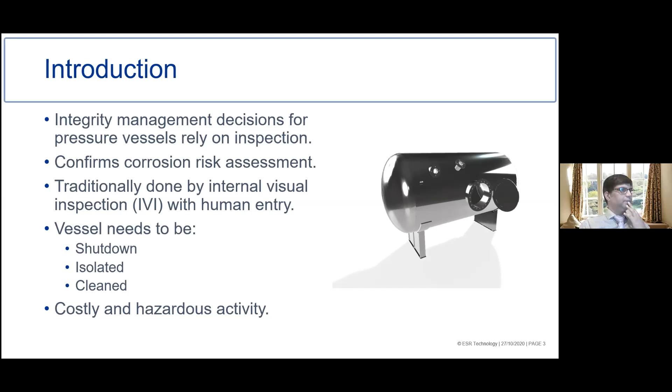And that's where non-intrusive inspection comes in. NII is a process, it's not a technique. It uses non-destructive testing techniques within it, but it's a whole process.

It's usually carried out externally of the pressure vessel, and normally when that pressure vessel is online. So you don't have to shut down and you don't suffer production losses. Sometimes it may be carried out while the pressure vessel is offline, if it's particularly a hot vessel or something, but normally you can do it online.

The thing is that internal visual inspection is usually much more flexible than NII. When you put somebody into a pressure vessel, they're able to look around it without necessarily having advanced knowledge of what type of degradation they're looking for, and they can change their inspection techniques, adding extra inspection techniques while they're in there if they have concerns.

So in order to do NII, we have to think a bit differently. There's a really big emphasis on understanding the degradation types that could be in a pressure vessel, because inspection techniques are very morphology specific. They have different probabilities of detection depending on the type of degradation that's there. One technique may be very good at detecting wide pits, but if it's a very narrow pit, that technique may fail to pick it up. So it's really important that we have an understanding of it.

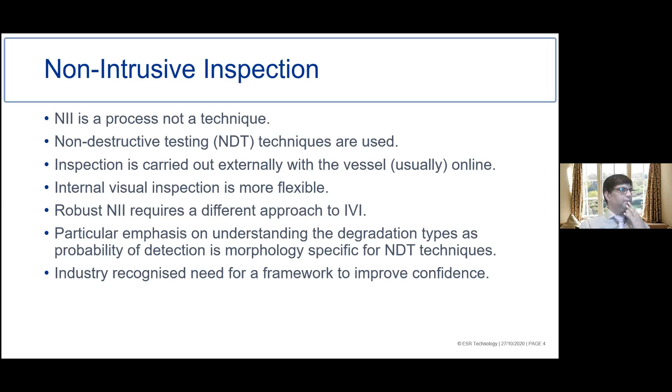To give a brief history of the recommended practice, NII has been used well before 2000, in high value cases, with a lot of design for the inspection coming from the nuclear industry. It started in 2000 that there was a move to have a more rigorous approach to it.

HOIS started development of NII guidelines, driven by operator members and the UK HSE. At the same time, Mitsu-Babcock sponsored a project into NII, and those outputs were shared and included within the HOIS development. Some pilot projects were run with ESR technology in ConocoPhillips and Marathon, and then there was wider application by a limited number of operators.

Following all that testing, in 2007 HOIS published the first set of recommended practice through DNV, as DNV-RP-G103. The choice to publish through DNV at the time was because HOIS didn't enjoy the public awareness that it has now, and it was to try and reach as wide an audience as possible with the publication.

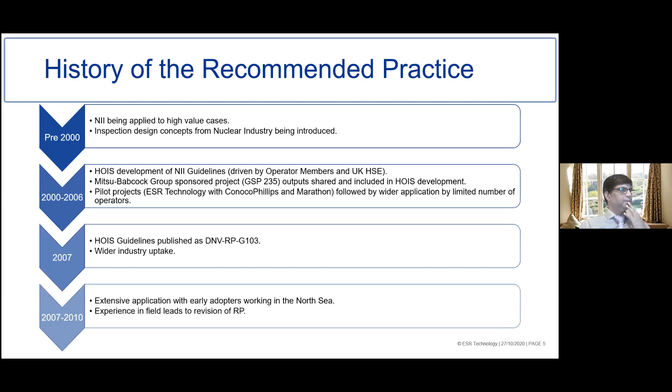Following the publication, there was a wider industry uptake, and we saw extensive application between 2007 and 2010. With the increased application, people realized that the recommended practice could do with some updates.

In 2011, the year I started in NII, the second revision of the recommended practice was published, and it included options for deferring instead of just replacing an internal visual, and also had requirements for the evaluation phase of NII.

Again, there's more increase from 2011 to 2017. We started seeing more uptake around the world. HOIS also developed a recommended practice on statistical analysis of inspection data to help support the evaluation phase of NII. And operators started building NII into their internal processes and setting targets for its use.

But again, we realized that with the greater interest in NII, it was time for another update. The OGTC also supported greater industry uptake of NII, and there was more interest in having NII thought about from the design stage of building vessels. So in 2017, another project was started to update the recommended practice, and finally this year in February, we managed to get the third revision published. This time it was published through HOIS as HOIS RP 103.

So I'm going to talk about the updates to it today. At the same time, we also published guidance notes to support the recommended practice, with the support of OGTC, published as HOIS G103.

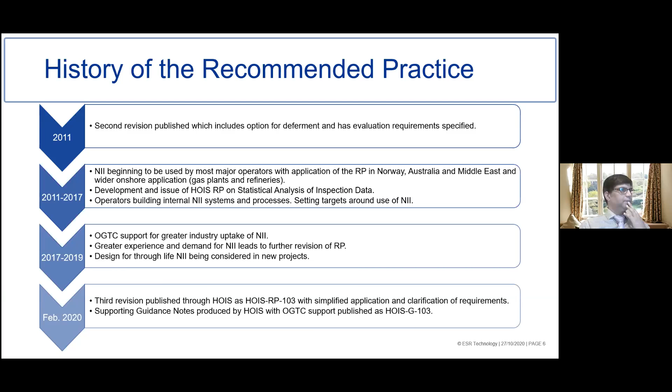So the NII process fits very much into the whole Energy Institute's idea of plan, do, check, and act. I'll go into each of the processes in more detail, but the plan is where you assess whether NII is suitable and develop a work scope. The do is inspection, the check is evaluation, and the act is updating your RBI.

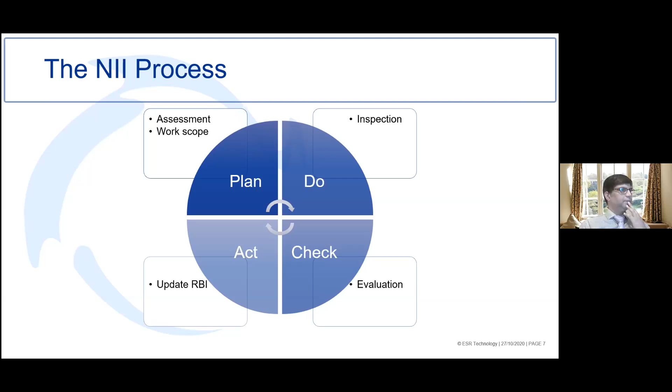So the NII process, we start with an assessment where we review the process of the vessel, the process history, the inspection history, and the corrosion risks. This is a really important phase, and it's important that we get good corrosion knowledge or input into this phase. It's at that point you determine the suitability of the vessel and what coverage is required, what techniques, and the locations.

You then develop a work scope to provide instructions to your inspection team and include your reporting requirements. We've also got the inspection phase.

Sorry, I just realized I didn't have the plan, do, check, act there. So in the do part, the inspection phase, you inspect the work scope and conduct any additional inspection if required. So although I said IVI is flexible, NII is less so—if the technicians find some corrosion out there, they may extend the work scope depending on what they find.

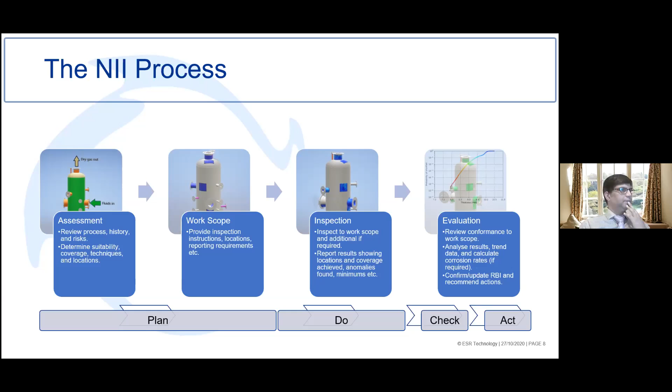So the report is generated from the inspection showing what locations were covered, any anomalies found, and what the minimums were. And then the final phase, the check phase, is the evaluation, where you review how well that inspection matched the actual work scope. You analyse the results, trend data, calculate corrosion rates if required, and confirm or update your RBI and act on any recommendations from the evaluation.

So I'll start going into some of the updates. The first phase is an assessment, or screening, where you're determining at a very high level whether a vessel would be suitable for NII. There used to be a question: was the vessel designed specifically for NII? We've removed that question, because even if a vessel was designed specifically for NII, that doesn't necessarily mean it would still be suitable for inspection. So that's now been removed.

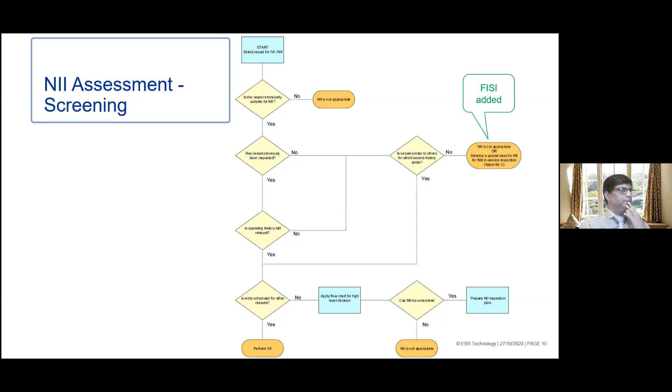But in the screening phase, we now have first in-service inspection. Previously, if the vessel had never been inspected before, and it wasn't similar to vessels you already had history for, it was advised that you should do an internal visual inspection. But particularly in Australia, where the first inspection is due within the first year, an NII approach is still preferred. So we've now got a section on FISI, or first in-service inspection, where you have to have a much stronger corrosion risk assessment than for another NII, and you have to do a lot more coverage.

Once you've gone through the screening, you go into the actual suitability assessment. There's a flow chart which basically asks three questions. It looks at the confidence and ability to predict the type and location of degradation, the previous inspection effectiveness, and the severity and rate of degradation.

So obviously, if you haven't got a lot of confidence in the corrosion that's there, you probably should think more about doing IVI. And similarly, if you have a very severe rate of degradation, there's higher consequences, or more likelihood of higher consequences if you were to miss some degradation. This flowchart just takes you through it. The new guidance note provides suggestions for the selection, trying to help with examples about how to determine each of these levels and the answers to these questions.

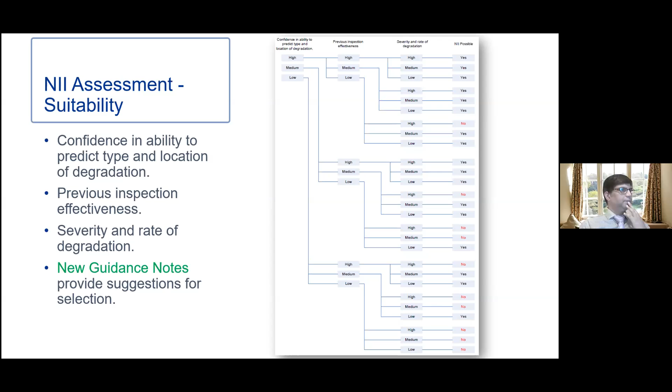If you determine that a vessel is suitable for NII, there are 3 different strategies you can take. Type A, where the aim is to confirm there's no onset of degradation, which would be a sampling inspection. Type B, which is to confirm your predictions, also a sampling inspection but at higher coverage. And type C, where you're confirming absence of flaws of a particular defined limiting size, which is like 100% coverage. The changes are in the recommended practice now, and the flowchart on the right is new, to help people who are more visual in how they read things.

Type A was originally intended for vessels that are corrosion-resistant alloys, or clad internally with a corrosion-resistant alloy, to confirm there's no onset of degradation. But we've now explicitly allowed carbon steel vessels, with the proviso that they really do have to have a very good history of no corrosion at all, and it is very unlikely you would see corrosion. So it's more along the lines of dry gas processing vessels.

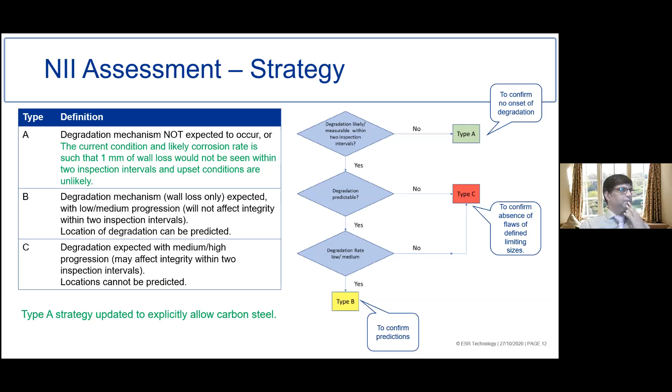The recommended practice also now has much more detailed descriptions of how to set the requirements for an inspection. There are now calculations to help you work out what sort of coverage you should be applying for type A and type B inspections. There are also tables to help you set the probability of detection requirements - that's the depth of imperfection or flaw you're looking to find, and what aspect ratio that should be at, how wide it is compared to its depth. It also gives tables for accuracy, and both probability of detection and accuracy are based on consequence of failure or some other value.

So like I was saying earlier, the strategy and the inspection requirements rely on a good understanding of the likely degradation.

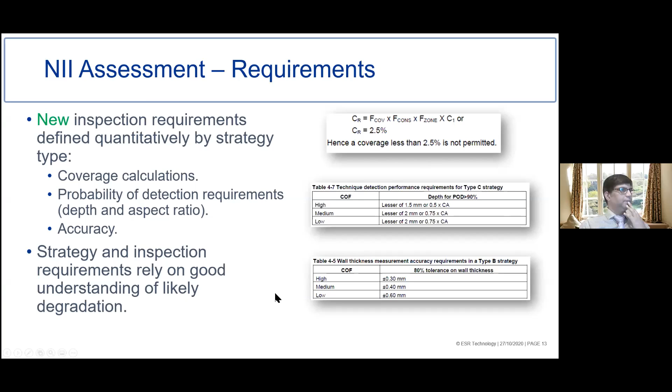One of the new things in the recommended practice is this idea of density and homogeneity, and it being related to spatial distribution. So on this drawing, for example, you've got two boxes. You've got a red box around an area which has got a lot of degradation in one small area, so you would call that quite a high density. Whereas in the green box, it's a low density - there's less flaws within the same size of area. But between the two, they're very different in terms of the spatial distribution, the homogeneity.

If you imagine - because if you look at the big image, you think that, well, this is quite homogeneous, it's pretty much the same everywhere. If you were to take a sample, you should be able to find degradation and be able to work out the other areas that you haven't inspected. But when you actually start splitting it up, it can be very different.

These are new concepts, and at the moment there's not a lot of information out there about what to expect in terms of how dense you can expect, for example, CO2 corrosion to be. It is discussed further in the guidance notes, and some examples are given, and it's quite a common sense approach. So for example, something like under deposit corrosion is likely to be low density and low spatial homogeneity, because it can just be very isolated if you just have one deposit sitting on the bottom of your vessel.

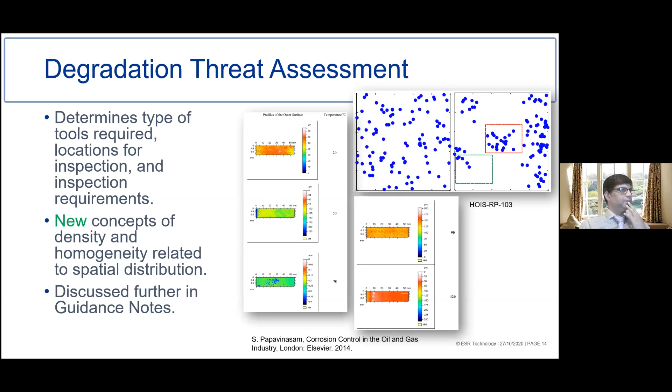Once you've determined your coverage you can then move on to recommended techniques. You have to set what inspection techniques, and the recommended practice has now got a simplified approach to this. It's got a table that looks at vessel features and what strategy that would be applicable to, and some suitable techniques, so it just makes it a little bit easier to specify what techniques would be suitable.

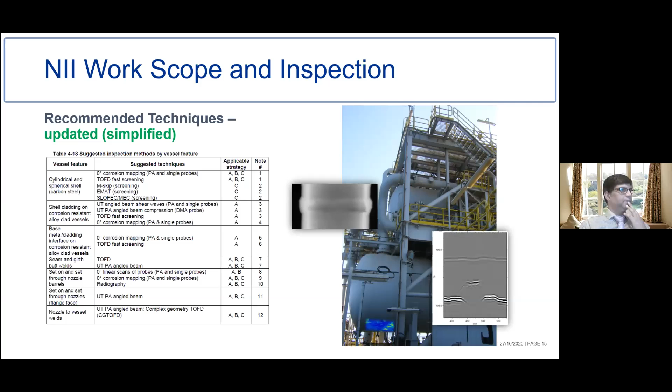And the evaluation section, this is often the bit that people forget to do, but we have to check that the inspection actually met the requirements that were set out.

The recommended practice now separates out the concepts of conformance and analysis. In conformance, you're basically saying, did we get the right coverage? Did we get the right locations? Did we use the right techniques and probability? And did we achieve that probability of detection?

There's some updated definitions of conformance in the recommended practice. The analysis section, where we determine corrosion rates and things, now includes information from the HOIS statistical analysis recommended practice.

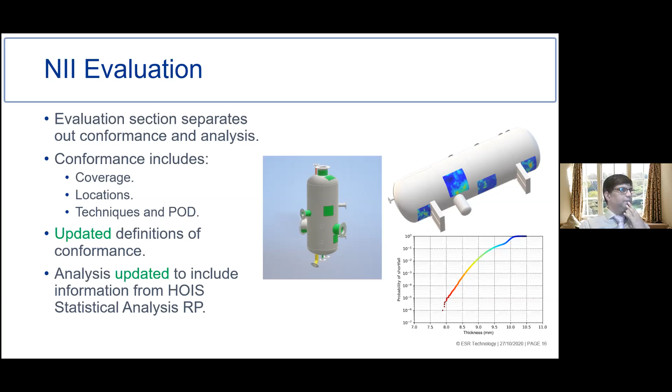To summarize the changes that have been made in terms of updates, it's a HOIS publication now rather than DNVGL. We've removed the screening condition of was it designed for NII. Type A strategy now explicitly allows carbon steel vessels, and the technique selection advice has been updated, along with updates to conformance levels and evaluation phase.

In terms of new things, there's the strategy flowchart I showed you earlier. There's now a quantified definition of requirements by strategy types, so all those calculations and tables are now in there. We've introduced the concepts of homogeneity and spatial distribution of corrosion, and there's first in-service inspection guidance. So there's quite a few new sections and appendices.

There's a review of the candidate inspection techniques. There's some advice on vessels that are internally clad, and some advice for designing vessels for inspectability. There's advice on doing NII as a repeat, and NII as the first in-service inspection. There's also information about the HOIS work on NII and IVI trials, and how to do some evaluation of the inspection performance achieved.

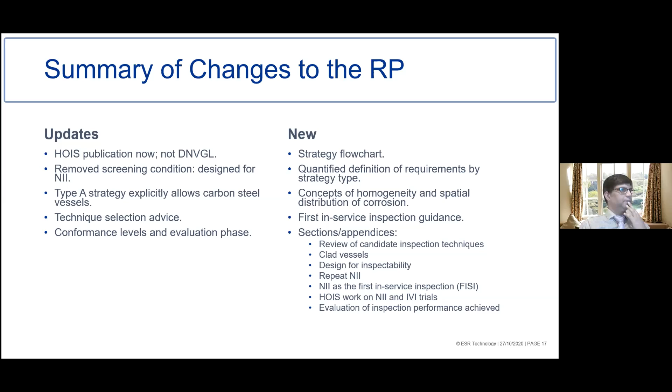So I mentioned the NII guidance notes, which was an OGTC and HOIS project. The first part of the guidance notes provides additional advice on each section of the recommended practice. But I think one of the bits that a lot of people will probably go to is the appendices, where there are a lot of worked examples for each different inspection strategy type.

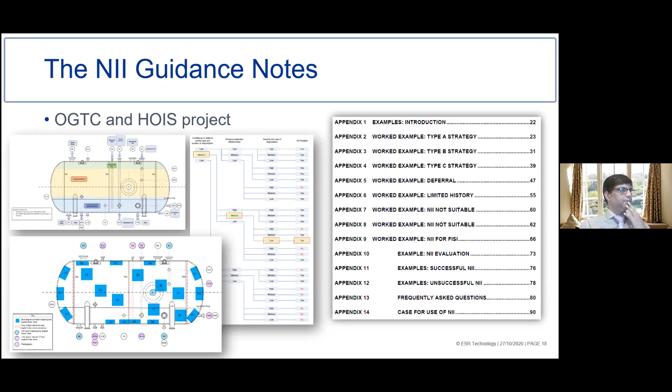For a deferral when you've got limited history, it also looks at when NII is not suitable, because NII is not always the best option. It also provides some successful NII stories, some unsuccessful NII stories, and some frequently asked questions, and it's got a 2-page summary to make it easy to put to managers the case for the use of NII. It's explained in more accessible language.

So in terms of some examples of applying the recommended practice, this is an example of where there was a hydrogen sulfide absorber. Internal visual inspection was required, but this was going to involve the removal and replacement in the correct order of 30 trays, and getting the correct orientation of the trays, which would mean internal scaffolding. Some surfaces were obscured from visual inspection anyway, and it was going to involve a 5-week outage.

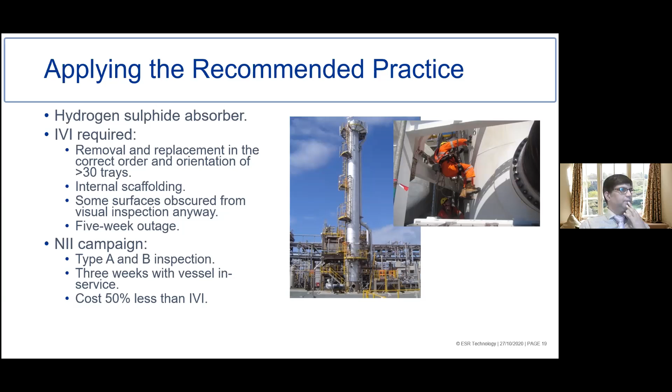The client did an NII campaign on it, involving a type A and a type B inspection. So the vessel was divided up into 2 regions, with different inspection strategies applied. It was a 3-week inspection, and the vessel was in service the entire time. Even the inspection on its own cost 50% less than doing internal visual inspection. So this was quite a success for that operator.

So what next? Well, interest in NII continues to grow, particularly as budgets are hit even more. Advanced inspection techniques are becoming much more standard. So what previously required getting in a specialist inspection company, a lot more incumbents now actually have the tools offshore.

The HOIS Recommended Practice for NII on clad vessels has been published. So that's an actual recommended practice for doing NII specifically on clad vessels. We're also working on remote internal inspection, a recommended practice for that, because one of the things NII doesn't tell you about is things like internal furniture.

HOIS is also developing a digital twin guidance document as 3D imaging starts to become a lot more popular, and being able to visualize your inspection results on 3D vessels. And obviously inspections are delivering more and more amounts of quantitative data, so there's also growing recognition of the value of data and the benefits of statistical analysis in support of NII.

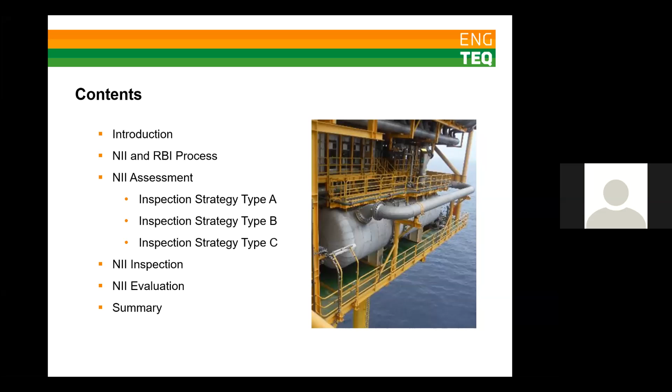So non-intrusive inspection should really be a team-based activity, in exactly the same way that risk-based inspection is a team-based activity, and for the same reasons. It's multidisciplinary, which requires input from corrosion, integrity, and inspection engineers mainly, but it might require input from other disciplines such as chemistry, process engineers, operations, etc.

One of the main reasons for using NII, for the benefit of the operator, is related to cost savings. As Susan's already said, these cost savings aren't necessarily down to lower inspection costs, but down to less plant shutdown time required for inspection. The equipment is normally inspected while the plant is still operating, and therefore it's still generating income at the same time. So senior management really are required to buy into this approach and appreciate that it might not be a cost saving in the conventional sense where there's money left over in a budget, but instead you increase your annual production. For example, if there are 52 weeks in a year, every week of shutdown saved equals approximately a 2% increase in production.

Corrosion engineers often play a central role in non-intrusive inspection and will be required to prepare much of the assessments and documentation, similar to RBI. In my personal experience, it's usually down to me to prepare the assessment, the work scope, and the evaluation documents with input from others, although this might vary between companies. The HOIS Recommended Practice doesn't say that this must be done by a corrosion engineer, it's just quite often that's the way things work out. So even if you are a working corrosion engineer and not directly involved with NII in the way that I am, you might see the results for NII when updating an RBA, for example.

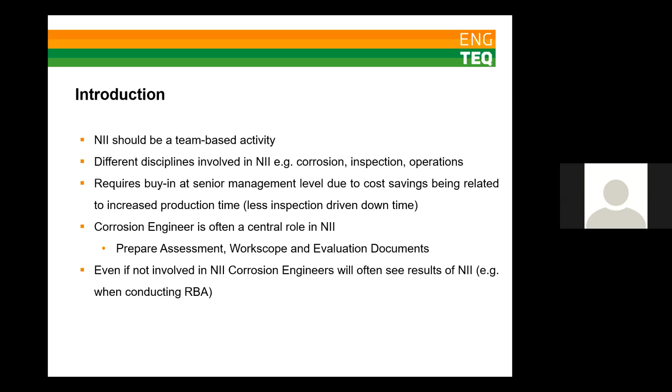So I want to discuss how NII and RBI fit together. NII isn't really a standalone process, it is in the context of RBI and inspection, so it doesn't aim to replicate the full RBI process. The figure on the slide is an example of a full RBI process or cycle, in this case taken from API 580. So in this case, the non-intrusive inspection really fits into the inspection plan box—that's only one box in that whole cycle.

And all the other parts of the process are driven by the RBI. So, for example, the consequence of failure or the risk ranking aren't really looked at for NII, nor should they be, because this would just be duplicating what's already been done in the RBI. NII is heavily reliant on the information already available in the data and information collection stage, and this information should be readily available in the integrity management system already. The more readily available this information is at the correct level of detail, the easier it makes it to make a case for NII.

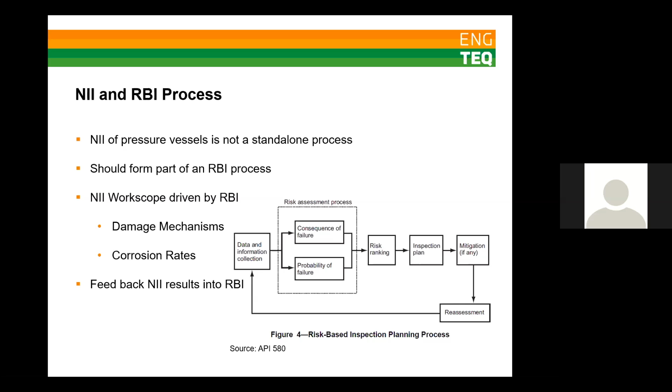So just to reiterate, NII is not a substitute for RBI. You can't determine the inspection interval from the HOIS Recommended Practice, and that's one of the key outputs from the RBI, so there's no point in duplicating it. One thing to say about that is that it is possible to assign a fraction of the existing interval as an inspection, to justify an inspection, which is perhaps a deferral scope, for example, so if you wish to defer for a specific fraction of the existing interval.

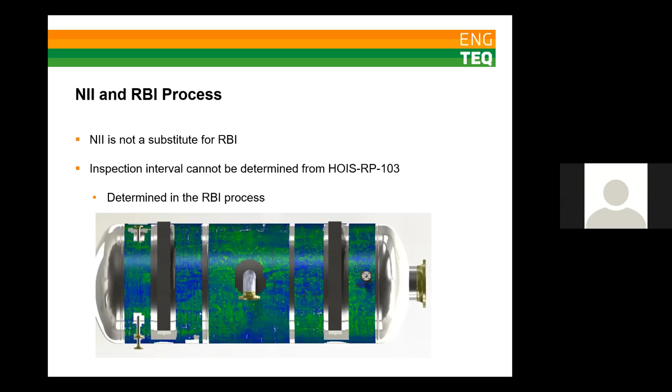Moving on to the first inspection type, as Susan's already introduced, Type A. This is where no degradation is expected, and usually applies to corrosion resistant alloy vessels, most commonly stainless steels, but maybe other materials as well. The most recent update to the recommended practice also allows carbon steel vessels with very low internal degradation rates to be inspected as a Type A strategy - for example, vessels in dry gas service with sufficient inspection history and high confidence that there's no process upsets or things that would cause internal corrosion.

And so, as you might imagine, Type A inspection also applies to carbon steel vessels which are internally clad with a layer of corrosion resistant alloy. One thing to point out, this is only mentioned really in the HOIS G0226 guidance on NII of clad vessels, is that there's now a new terminology here, Type A+. This Type A+ terminology isn't used in the recommended practice HOIS RP 103 for NII, but I want to talk more in a few slides later on about clad vessels.

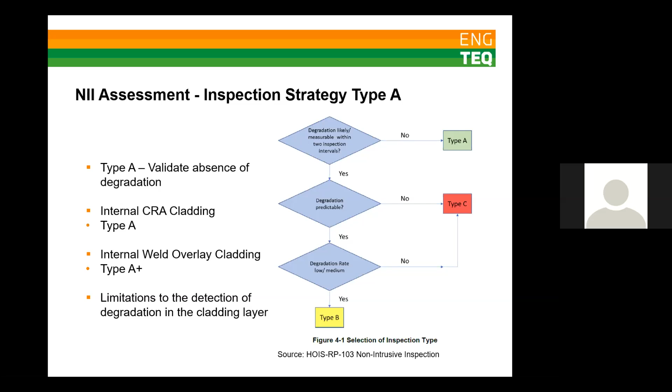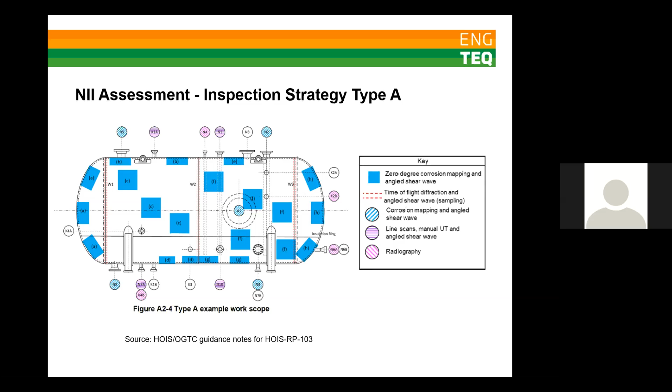So this is really what you might expect to see in the inspection results for a Type A inspection. In this case, this is a hot roll bond cladded vessel - a carbon steel vessel that's internally lined with corrosion resistant alloy. The hot roll bond cladding is the most common type, where the stainless steel and the carbon steel are fused together by rolling at temperature in the mill, and then the clad plate produced is used to fabricate the vessels.

So this results in a plate with a fine grain structure in both the substrate and the cladding. This means that angle beam shear waves are often possible to be used for detection of stress corrosion cracking in the vessel shell or the cladding layer. So inspection techniques should be sensitive to low-level degradation in the corrosion-resistant alloy clad layer, and typically we would be doing a 0 degree method for wall thickness along with an angle beam UT method for signs of cracking.

Extensive in-service stress corrosion cracking is likely to be detected in most cases. However, detection of localized finer scale stress corrosion cracking is more difficult to conclusively identify, and there's a risk of false calls due to backscatter from the clad layer. So there's currently no method with the capability to detect fine hairline pitting on the internal surface of the cladding either.

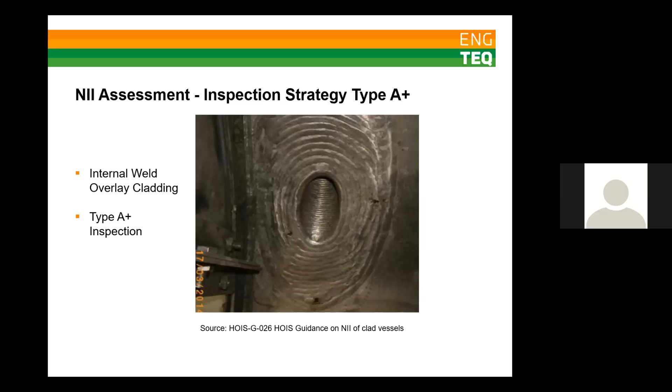So we have to come to the conclusion that it may not be possible to detect fine pitting or stress corrosion cracking in weld overlay cladding. But then these are the morphologies of concern most often in stainless steels. So how can we inspect weld overlay clad vessels if there's no reliable way to detect fine pitting or stress corrosion cracking?

So we have to look at the interface and the carbon steel substrate itself for signs of damage, and this is what we mean by a type A plus inspection. Where there's a reasonable likelihood of failure of cladding, the inspection should aim to identify any delaminations between the corrosion-resistant alloy cladding and the vessel shell.

These can occur immediately after manufacturing, but they can also be caused by service-induced degradation. And in the case of stress corrosion cracks developing in the cladding, you'd expect them to grow and reach the interface, and it's most likely that they would then cause delamination or disbonding at the interface, since the mechanism for continuation of crack growth in carbon steel would be different to that for the clad material.

So if the conditions are right, there is a possibility of cracks from the cladding progressing through the interface into the carbon steel, or under cyclic loading conditions by fatigue, but this is probably less likely. So if corrosive fluids reach the interface due to cracking or any other local failure of cladding, then this would lead to corrosion of the carbon steel starting at the interface.

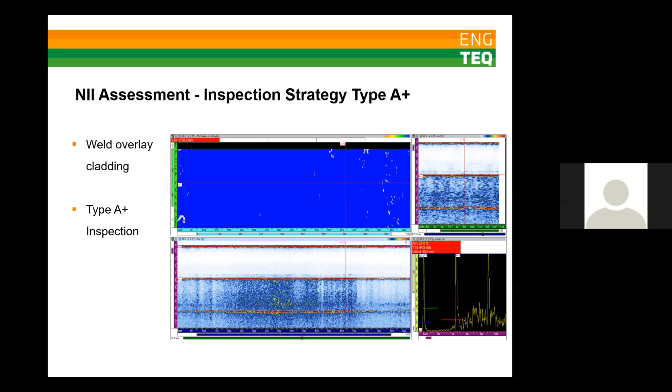So the second main type of inspection strategy is a Type B. This applies when the degradation rate is low to medium and is predictable in the degradation likelihood, the location, and the rate. And again, this information should be available from the RBI. All these inspection types are very heavily dependent on the information that's already available.

Coverage in a Type B inspection is typically lower than a Type A. It's usually 25% as a starting point, although it may vary significantly from vessel to vessel. It may be less, it may be more. And coverage is determined using the equations that have been added to the current version of HOIS RP 103.

So this is a sampling inspection, so that in the areas that haven't been inspected, it's important to estimate the worst case flaw in the areas which haven't been inspected using statistical analysis.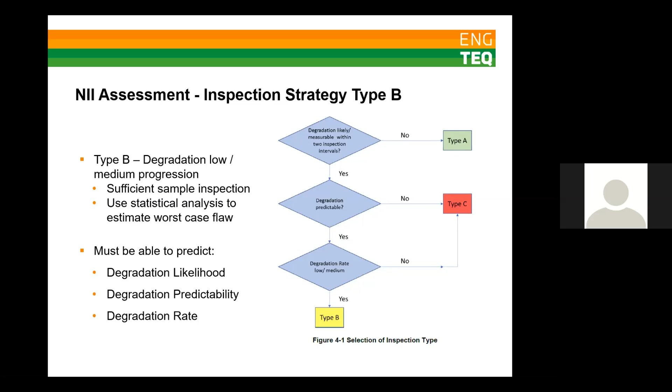And then the rest of the vessel is subject to a sampling inspection with coverage spread throughout the vessel. So the results for this inspection may then be used to estimate the worst case flaw for the remaining area by statistical analysis, provided that the areas inspected are representative of the areas that haven't been inspected.

So note again that the nozzle coverage is similar to the Type A example. There's more than 25% coverage at the nozzles. So again, you're looking at the main process nozzles individually, so that's the inlets and outlets, for example, and then a sample of the minor nozzles.

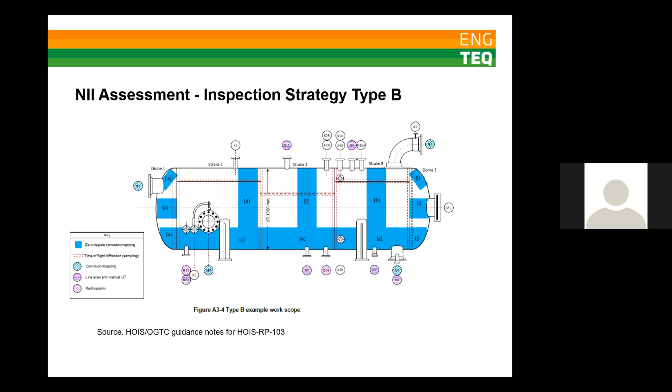The third and final inspection strategy type is a Type C. This is applicable when degradation is expected to be medium to high rate, but the location can't be predicted. And the aim of a Type C inspection is to directly measure the worst area of degradation.

So this is typically applicable to carbon steel vessels with an internal organic polymer-based coating. The coating there protects the carbon steel, but unfortunately, organic coatings have a finite in-service lifetime, and this can be very hard to predict. So some coatings can fail very quickly, within a year or two, and others could last for decades. But once the coating fails, the carbon steel is exposed and may corrode quickly.

So the location of coating breakdown is considered to be random and is therefore impossible to predict. If it's not possible to inspect for coating condition, we must inspect for wall loss in the carbon steel. It is also not possible to estimate what's happening in one location based on another, unlike in a Type B inspection. So if, for example, we were to inspect 50% and find no corrosion, there's absolutely no confidence that there's no corrosion in the remaining 50%.

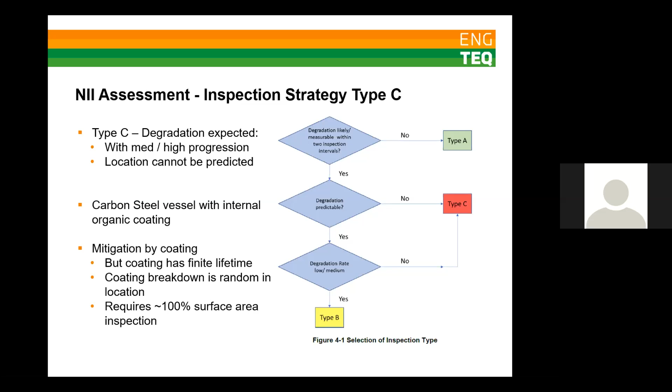Non-intrusive inspection is really for the detection of internal corrosion only. External corrosion isn't addressed. But this is obviously the case for an intrusive inspection as well, of course. So the requirements for an external inspection should be set in the RBI. This includes the inspection frequency, which might be different to the internal interval.

But one thing that needs to be considered is: is it possible to overlook external issues? Quite often we inspect vessels with more external corrosion than internal corrosion.

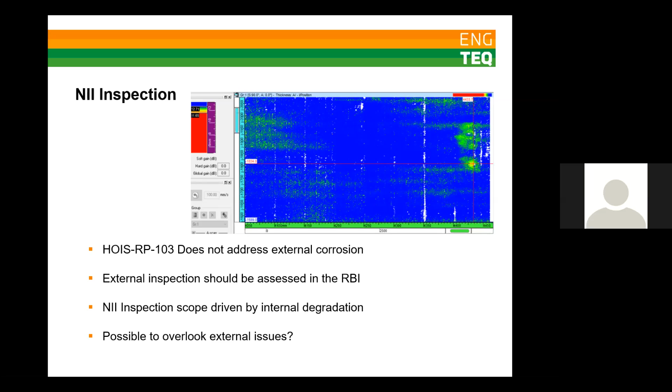So take, for example, corrosion under insulation. Corrosion under insulation, as I'm sure everyone knows, is one of the main corrosion threats in the oil and gas industry. It's very difficult to predict the location and severity of CUI, and there's no universally adopted inspection strategy.

Different people have different requirements for CUI inspections, so it can be quite difficult. But insulation removal should be driven, in this case, also by a CUI inspection, rather than just relying on the areas that have been removed for internal inspection.

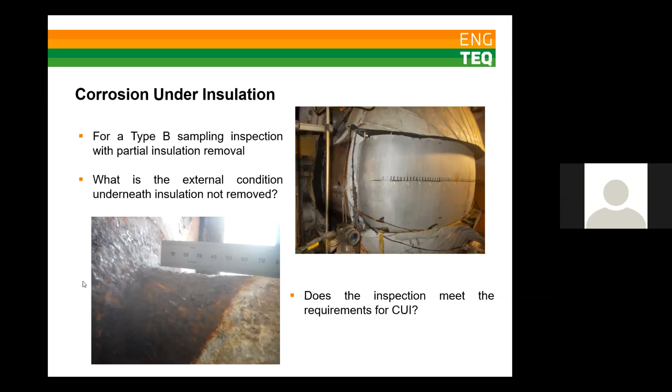The final stage in the NII process is the NII evaluation. Once the inspection is complete, this doesn't mean the entire NII is complete. The conformance and analysis of the inspection results are very important, and it's this output which should be used to feed back into the RBI cycle.

The analysis and evaluation of the data collected in the inspection is much more involved than it would be in a more straightforward example of pipework. In the case of pipework, the aim of inspection is just to quantify wall thickness, and the inspection report is usually the final output. In the case of NII, the task is only fully complete once the evaluation report has been issued. The inspection results should be compared to the requested work scope, looking for any non-conformances in the inspection techniques.

The surface area coverage and the locations inspected versus what's been requested - and what has actually been found in the NII, what do the results mean versus what's been predicted to be happening inside this vessel? Are the predicted locations correct? Are there any newly identified damage mechanisms? And on the other hand, are there identified damage mechanisms which don't seem to be active?

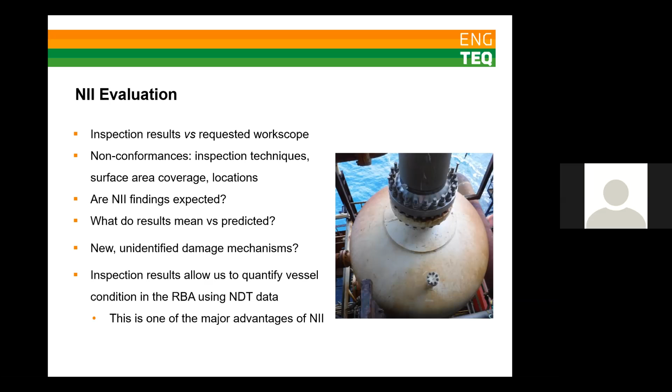So my last slide is just a brief summary of what I've said already. I want to emphasize the importance of how NII fits in with the RBI - that the RBI influences the NII, and then the NII feeds back into the RBI again in the traditional cycle. It's important to think about the findings against what was expected, and this should all be updated in the RBI, so the damage mechanisms and the likelihood of failure, leading into the overall risk, etc.

So that's really all I want to say. Thank you for your attention.